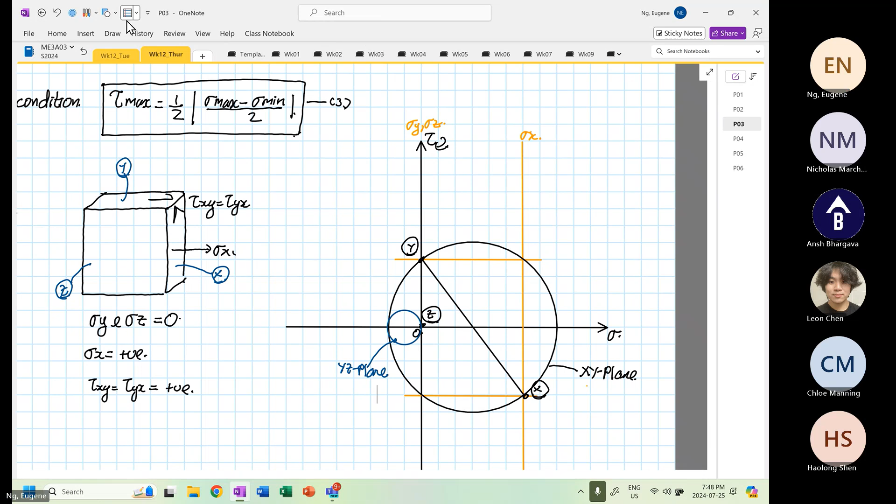And then if I were to draw the other two circles, right, if I were to use a different color to sketch the other two circles, so over here, this belongs to our YZ plane. And then the last circle, okay, so this now belongs to the XZ plane.

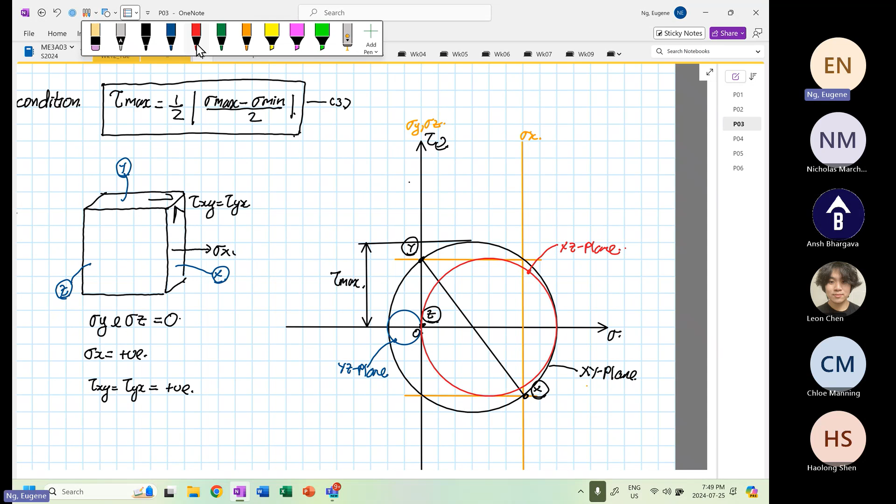Right, so it happened that the XY plane is the tau max now, right? So now we discovered that over here, this is our tau max, right? This is our tau max. And because it's the biggest circle, we also know that this tau max is this tau max over here, right?

So to label this, right, this will be our stress max. Over here, this will be our stress min. Okay, and then how to determine our stress max and stress min?

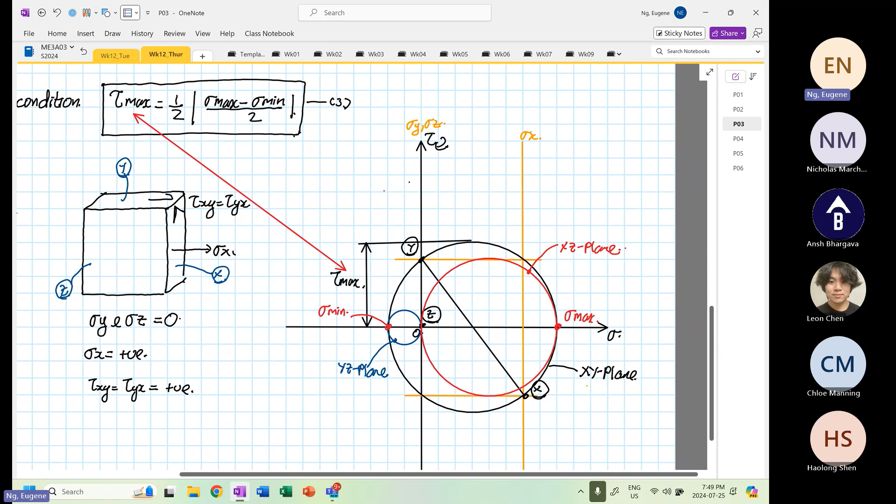Okay, so we are going to formulate it. Okay, so we know that as before, we have our stress average line. Right? So this over here, this distance from here to here. So this stress average that we're going to use is for our XY plane.

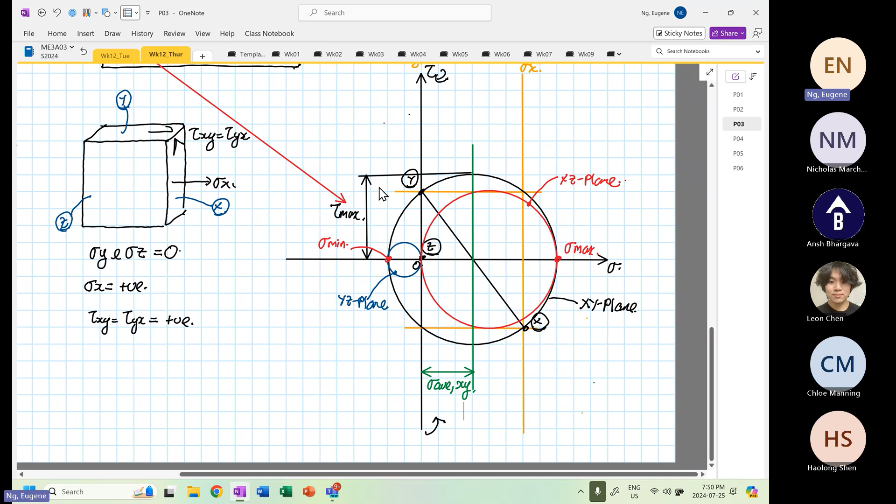Okay, so now if we have to formulate our stress XY, okay, so we are going to calculate our stress average. Let me see, look at space. Yeah, I think we're okay. So we have stress average XY is equal to stress X plus stress Y divided by 2, right?

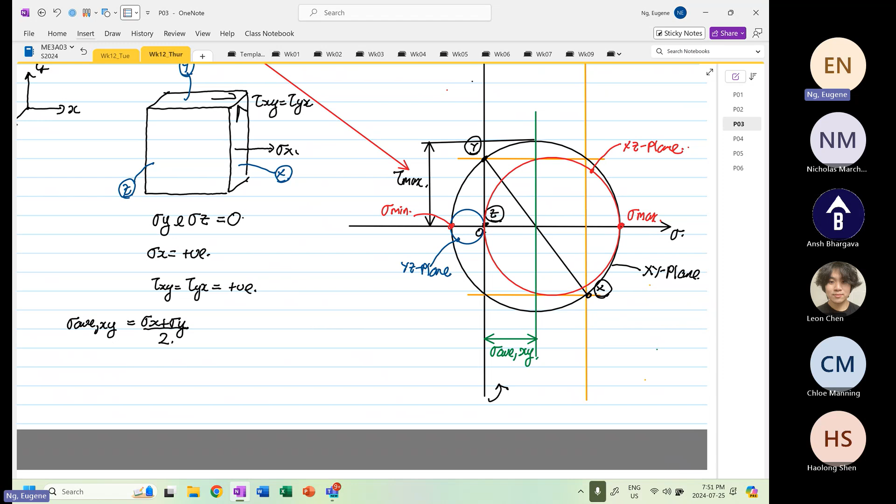And then to find our radius, okay, to determine our radius, this will be equal to square root. Still the same, I think the formula still is valid. So it's stress x plus stress y divided by 2, right, squared, plus shear xy squared.

Okay, but the formula, because once you have stress max and stress min, okay, one is in tensile. So stress min for this case, the difference between this Mohr's circle and the one before, right? Over here, the one before, this one for this case, stress min is equal to 0, right? Which is over here. So this over here, this is our stress min. And over here, this is our stress max, right?

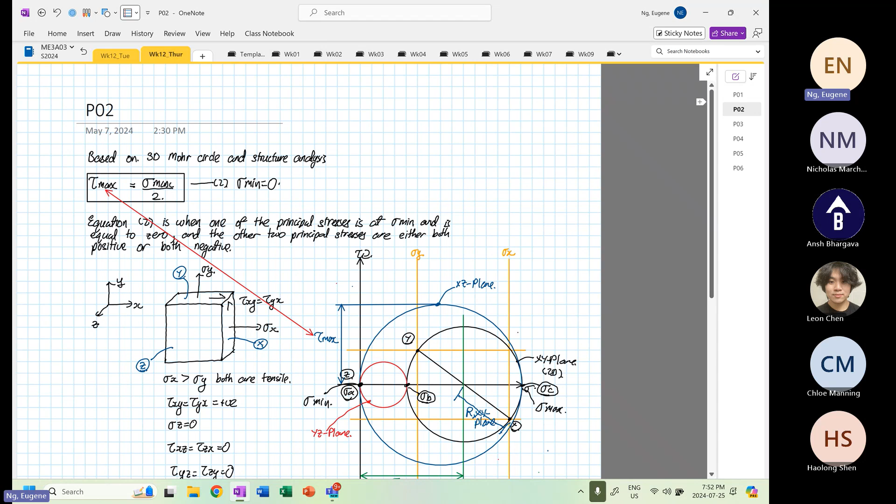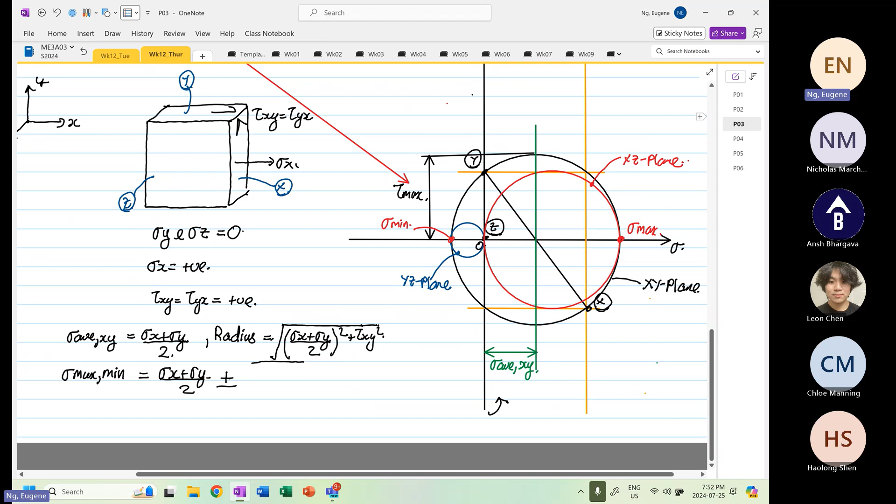So if we look at this one, right, stress min is not equal to 0 now, okay? So it's not difficult to calculate. So we know that stress max and min is basically equal to the stress average plus minus, right? Maximum is plus, minimum is minus, then the whole thing square root of stress x plus stress y divided by 2 squared plus shear xy squared.

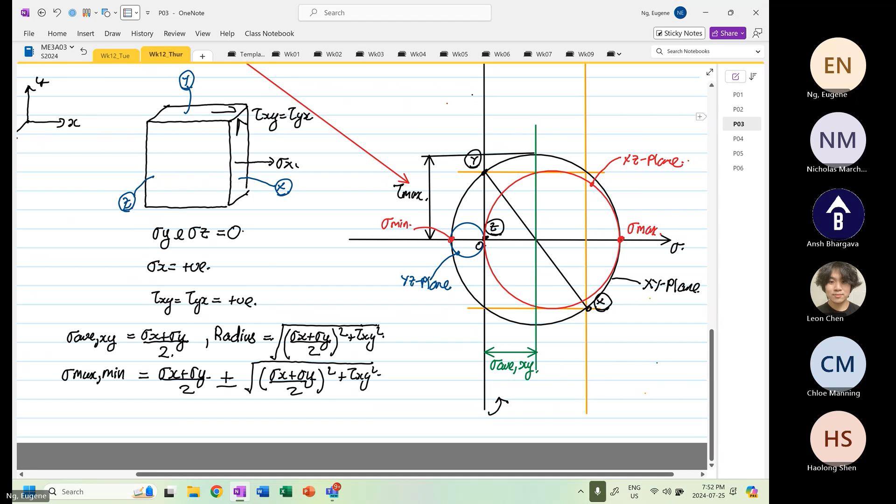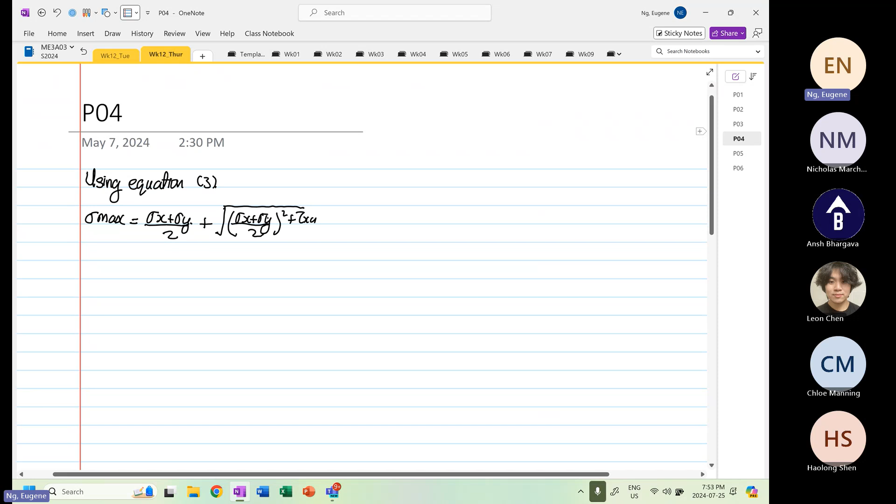Okay, so now if we were to plug back into equation number 3, right? If we were to plug back into equation number 3, so using equation number 3, we will have stress max is equal to stress x plus stress y divided by 2 plus, you have the whole thing you square root, okay, stress x plus stress y divided by 2 squared plus shear xy squared. And we also know that stress min is equal to stress x plus stress y divided by 2 minus, now, and then we have this form, as in stress x plus stress y divided by 2, the whole thing squared, plus shear xy squared. Okay.

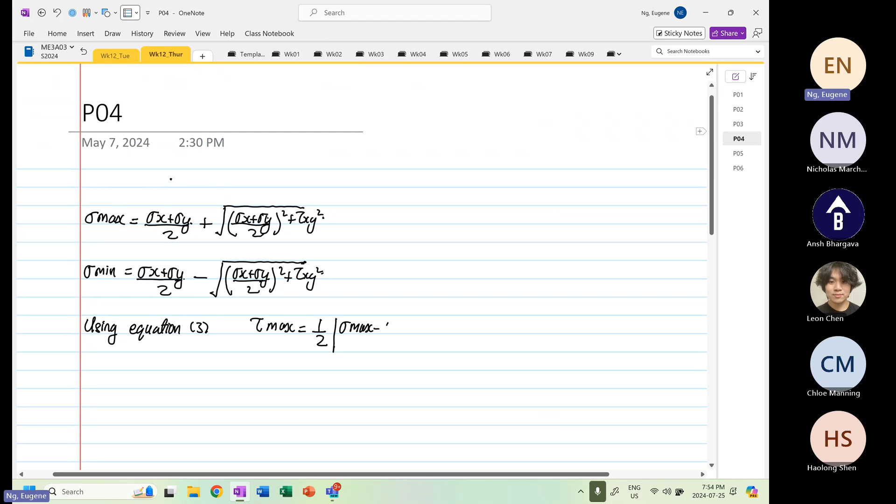So when we use equation 3, okay, I think my using equation 3 should be down here. Using equation 3, right, we know that the tau max is equal to half stress max minus stress min. Okay, so in this context now, if I put everything in, so what we have is we have stress max. Okay, I'm just going to copy and I'm going to just paste, putting bracket. And then I'm going to minus again. We'll take this whole thing.

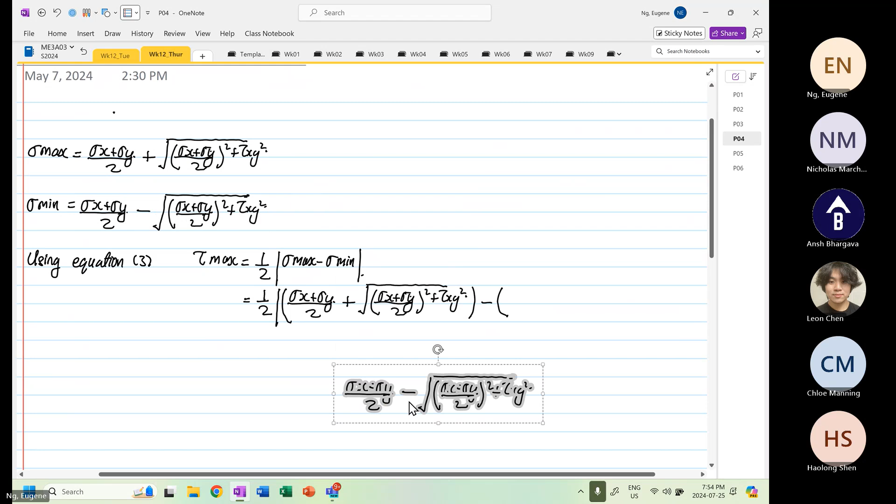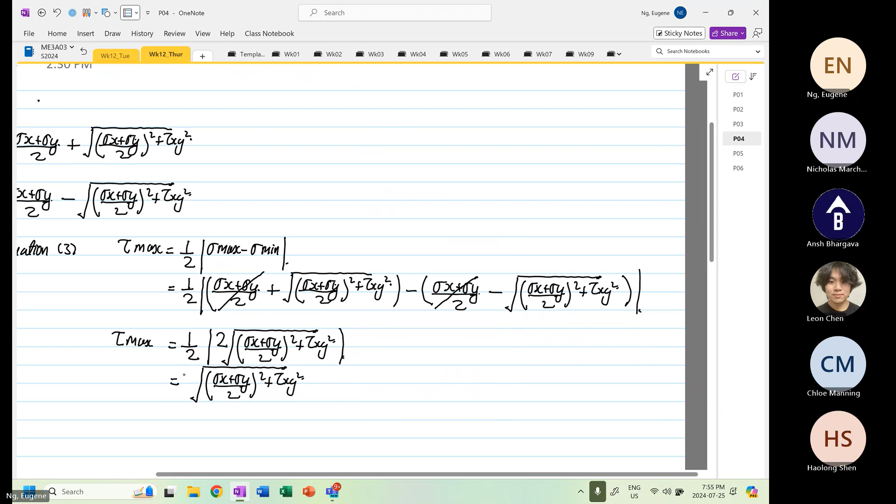I'm going to minus this term over here, and I'm close, so I can cancel this. So this is in fact equal to tau max is equal to 1 over 2, and then absolute value twice of this term over here, because minus and minus, when you take out the bracket, is plus. You have this term over here, and this is in fact equal to, once you cancel the 2 off, this value. So from here, you can see, right?

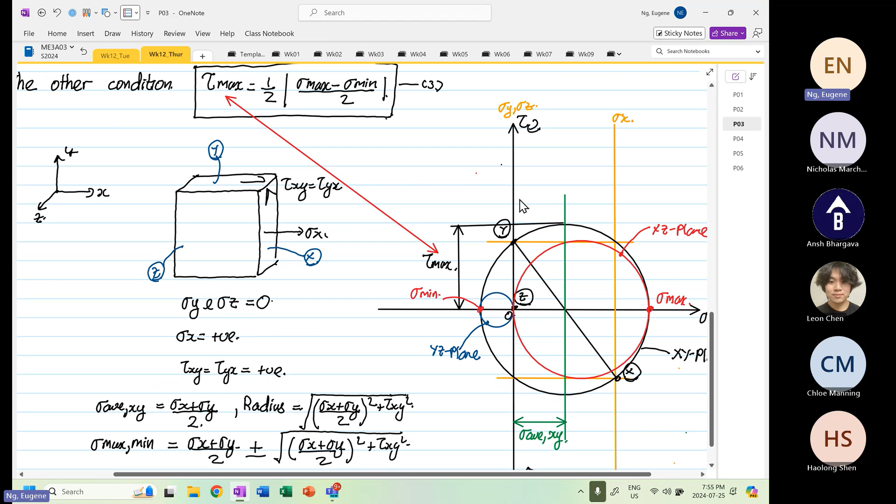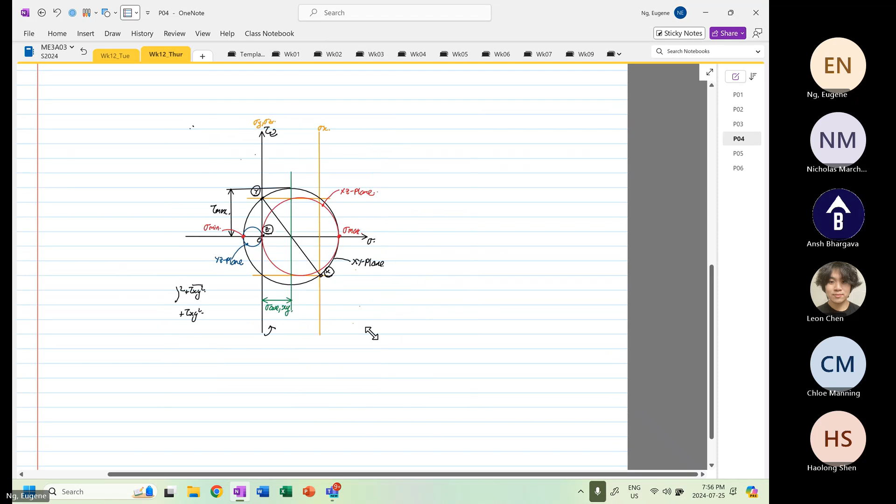So to quickly summarize, if your Mohr's circle looks like this, this is the formula you use. If your Mohr's circle looks like this, this is the formula you should use.

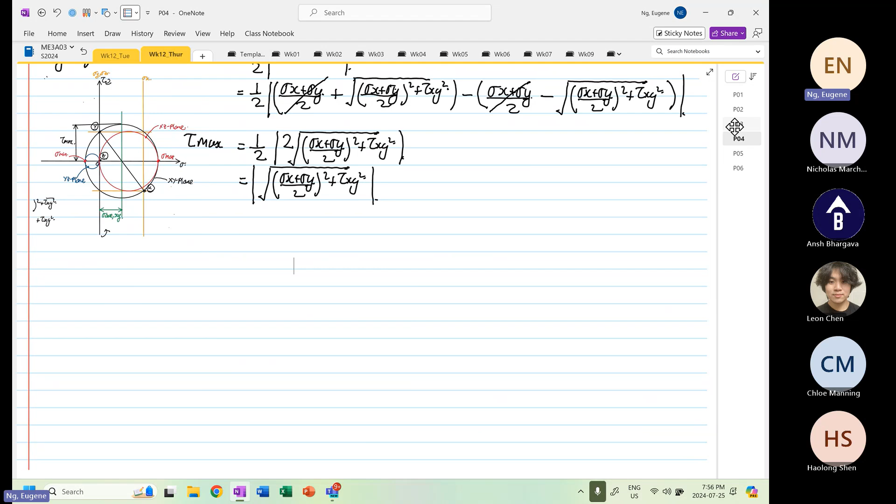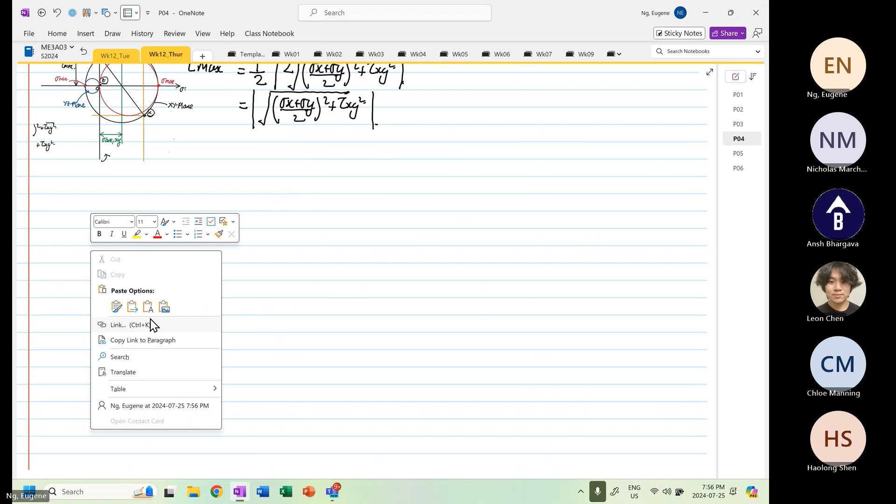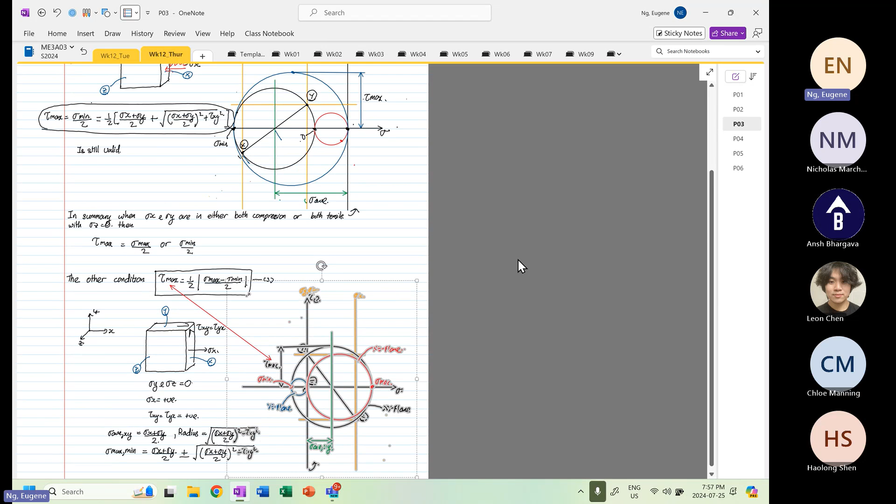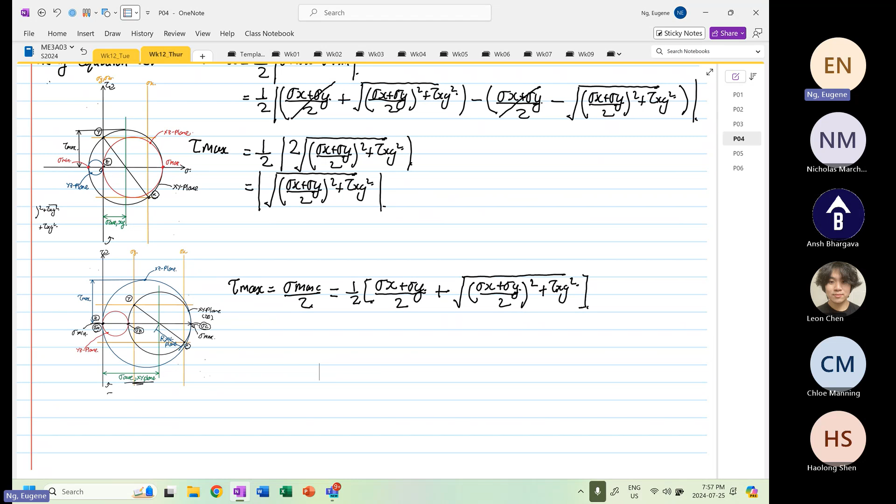Let me draw it bigger. If your 3D Mohr's circle has this configuration, and you can see the difference, one, the circle is either both positive or both negative, which I align them. If your Mohr's circle looks like this, then your formulation for tau max changes. You have to use this equation now, or calculate your tau max based on this expression. Then you have to apply this. So you can see the difference now. Both are Tresca, but it's dependent on how your Mohr's circle looks like, so the formulation is different.

So if you have a case where sigma max is positive and sigma min is negative, this is what you have to use. But if you only have sigma max and your sigma min is equal to 0, it entirely changes. So you have to first know how your 3D Mohr's circle looks like, not 2D. You cannot do this in 2D, impossible. I know textbooks only draw 2D, but no, you have to construct the 3D Mohr's circle, because in reality we're in a 3D world. I'm not saying that 2D is not important. As you can see, 2D Mohr's circle, you all learn how to draw using 2D, and 3D is just adding 2 more circles.

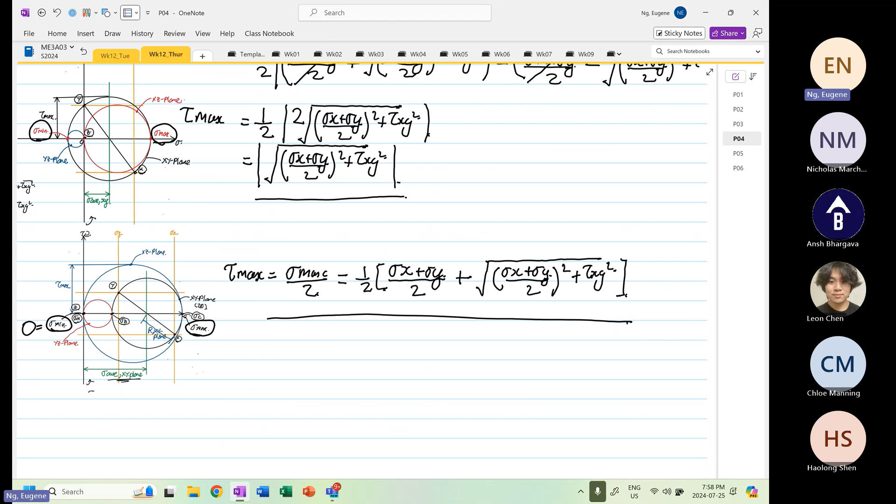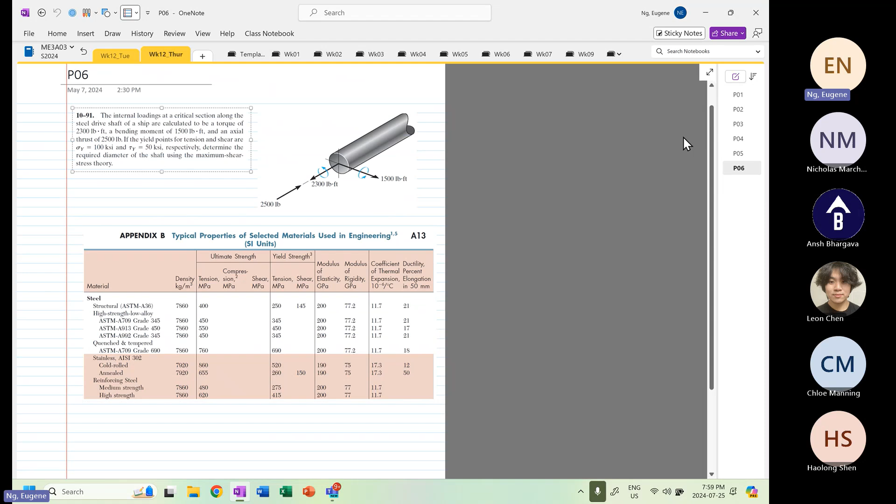So from here, what I'm going to do is look into a real engineering problem. When I say real, this is as real as you can get. This is a typical real engineering problem that we see, or that I see as an engineer. Let's look at this example, and this example is pretty long, but it's a good example. The first time I was doing it, it was pretty complex, but it's not that bad now, and I want to make sure it's not that bad to you either.

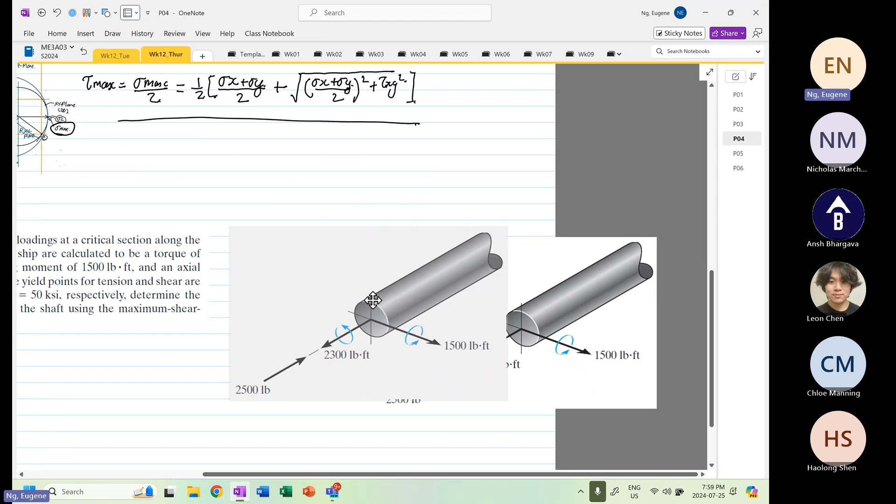So the internal loading at a critical section along the steel shaft of a ship are calculated to be a torque of 2,300 pound-feet and a bending moment. You can see down here, 2,300, this is the torque, and you have a rotation down here to highlight that this is a torque. You have a bending moment of 1,500 pound-feet, so this is our bending moment. And then we are also given an axial load of 2,500. As you can see, this is a real 3D loading problem now. What is fortunate for us in this case is we don't need to see what are the shear forces or point loads to determine the torque, the bending moment, and the axial load, since they are provided.

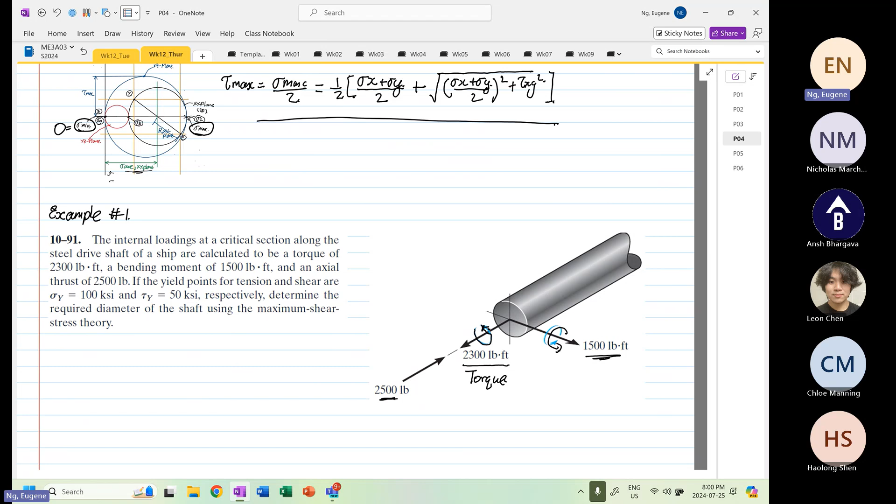So it also gives us the yield point for tension. We know that sigma yield in tension given to us is positive 100 times 10 to the power 3 pounds per square inch, so this is a material property given to us. And then the shear stress at yield is equal to 50 times 10 to the power 3 psi. Again, this is given to us.

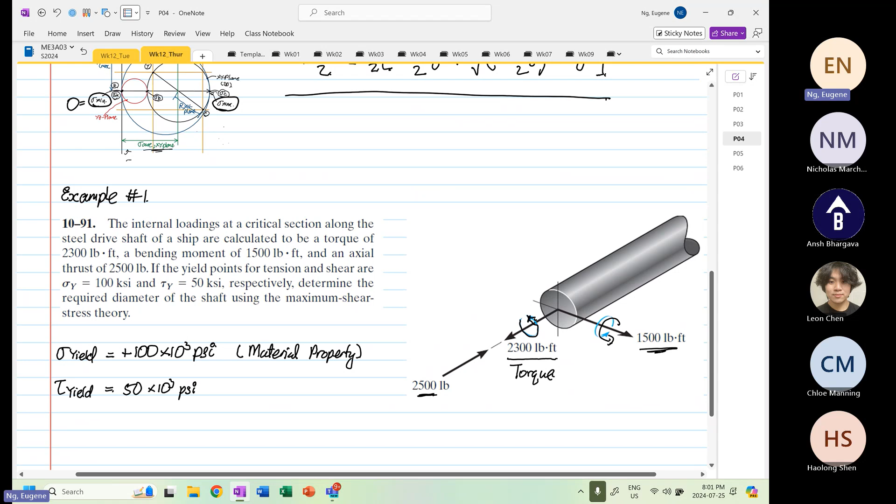So what we have to do is determine the required diameter of the shaft using the maximum shear stress criteria. We know that using the maximum shear stress criteria, tau max can be equal to sigma max divided by 2, or tau max can also be equal to sigma max minus sigma min divided by 2. We now have to determine which one. By just visually looking, we don't know, so we have to construct the element and construct the 3D Mohr's circle.